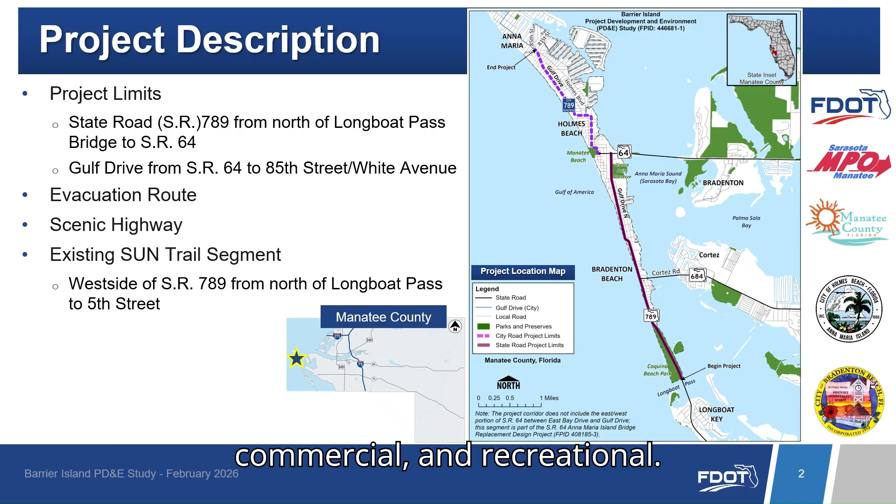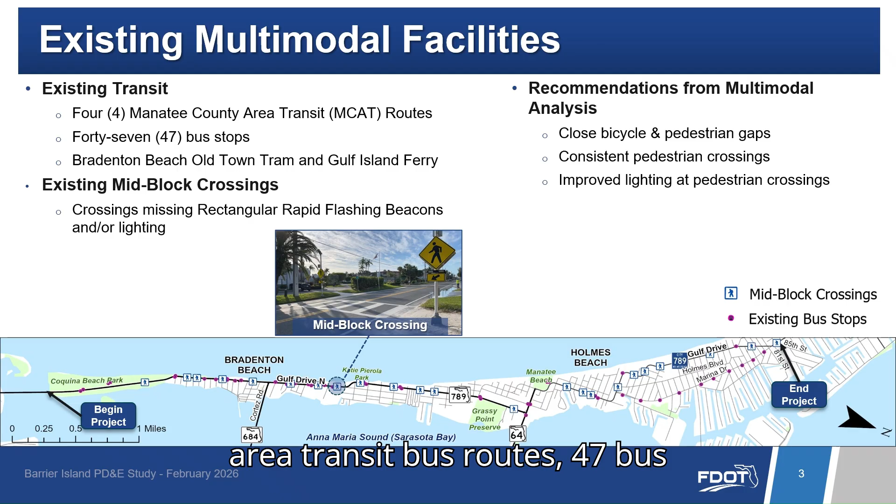The study area offers several ways to get around, including 4 Manatee County area transit bus routes, 47 bus stops, the Bradenton Beach Old Town Tram, and the Gulf Island Ferry.

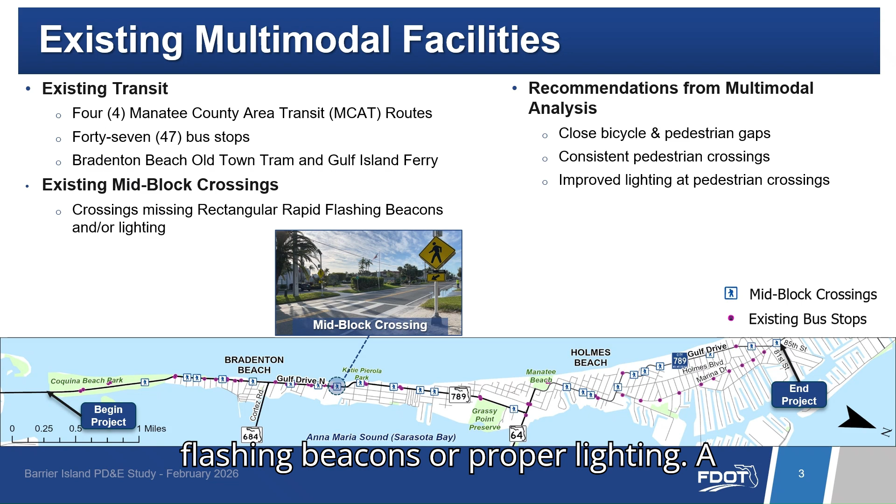Even with these options, there are still safety issues and gaps, especially at mid-block crossings, where some locations lack flashing beacons or proper lighting. A recent multimodal analysis recommends closing the bicycle and pedestrian gaps, creating more consistent crossings, and improving lighting to make travel safer and more connected for everyone.

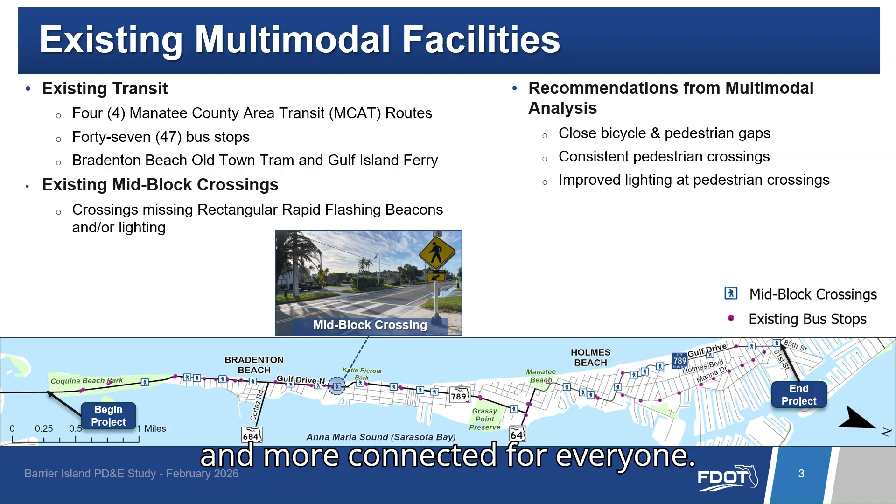This project aims to enhance safety, accommodate biking and walking, and improve connections between multimodal transportation options. The build alternatives will support connections to the SUN Trail network, enhance linkage to the multimodal improvements planned as part of the future bridge replacements to the island, and enhance connectivity and access to current and future transportation choices like the trolley service and the Gulf Island Ferry.

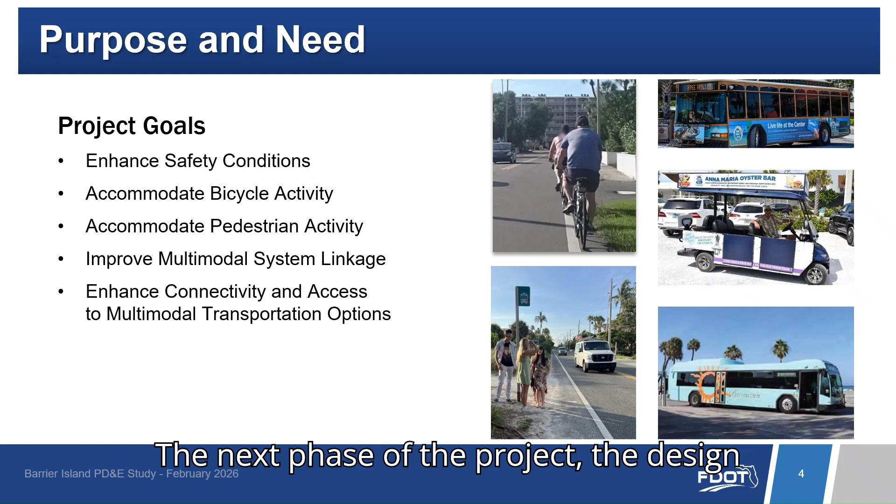The next phase of the project, the design phase, is not currently funded in FDOT's 5-year work program.

Within the project limits, State Road 789 and Gulf Drive are 2-lane undivided roadways. In many areas, shoulders, sidewalks, or bike lanes are missing, making the corridor insufficient for safely supporting people traveling by foot, bike, or other modes.

The State Road 789 segment of the project is classified as an urban major collector and extends from north of Longboat Pass Bridge to State Road 64, approximately 3.8 miles.

The Gulf Drive or City Road 789 segment of the project is within the city of Holmes Beach, from north of State Road 64 to White Avenue or 85th Street, approximately 2.2 miles. This segment of Gulf Drive is owned and maintained by the city of Holmes Beach. No bridges are being evaluated as part of this study.

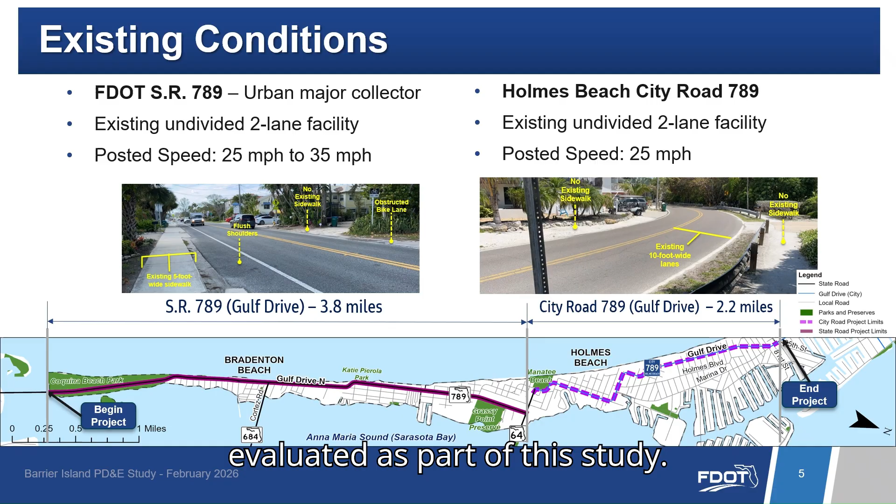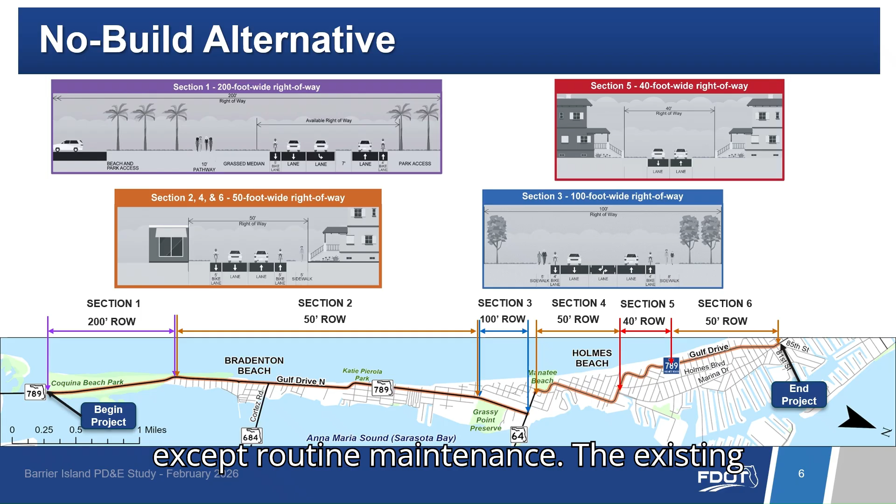Throughout this study, a no-build alternative is also considered. The no-build alternative assumes that no improvements are made to State Road 789 and Gulf Drive through the year 2046, except routine maintenance. The existing 6-mile corridor has a mix of roadway widths, walking, and biking conditions that change from one section to the next.

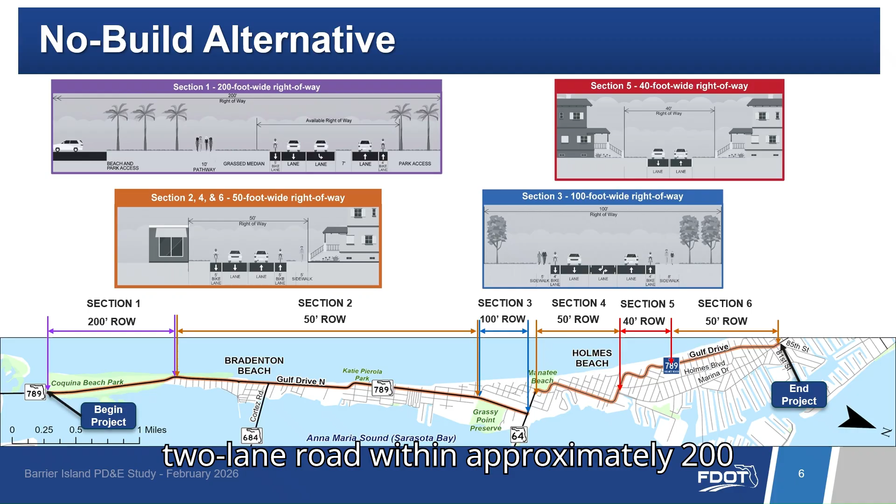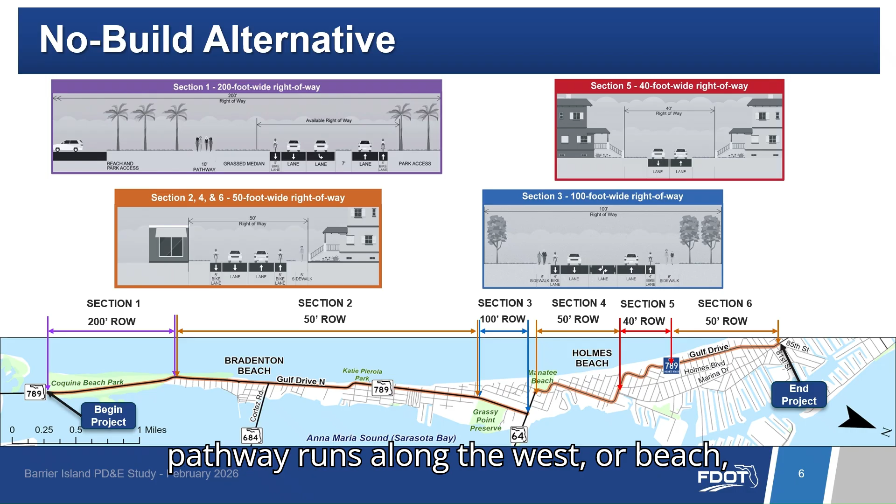In Section 1, State Road 789 is a 2-lane road within approximately 200 feet of existing right-of-way. Within the available right-of-way are 4 to 5 foot wide paved shoulders that are also used as bike lanes. A 10-foot wide pathway runs along the west or beach side.

In sections 2, 4, and 6, the sections narrow to about 50 feet of right-of-way and include a 2-lane roadway with 5-foot wide paved shoulders and a 5-foot wide sidewalk on the east side. On the west, where most of the beach access points are, sidewalks are limited or missing.

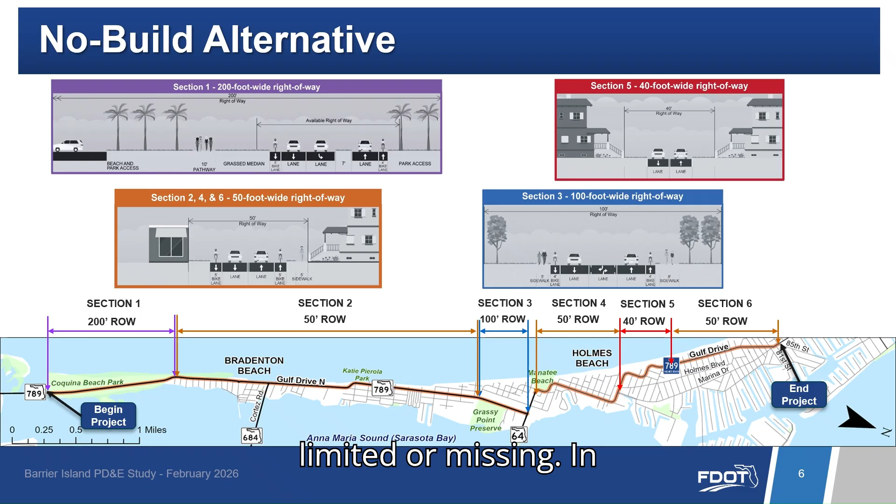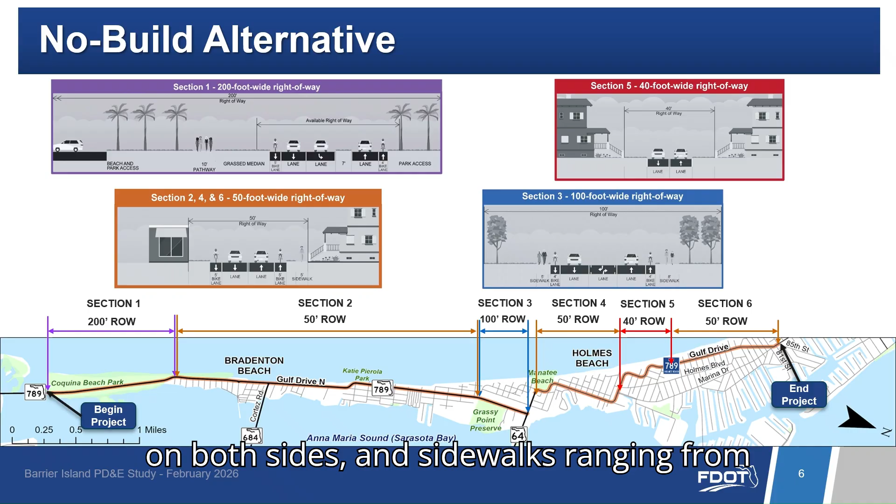In Section 3, the right-of-way widens to about 100 feet. The roadway includes 2 travel lanes with 4-foot wide bike lanes on both sides, and sidewalks ranging from 4 to 8 feet wide. In Section 5, the right-of-way narrows down to about 40 feet, with 2 travel lanes and no paved shoulders or sidewalks.

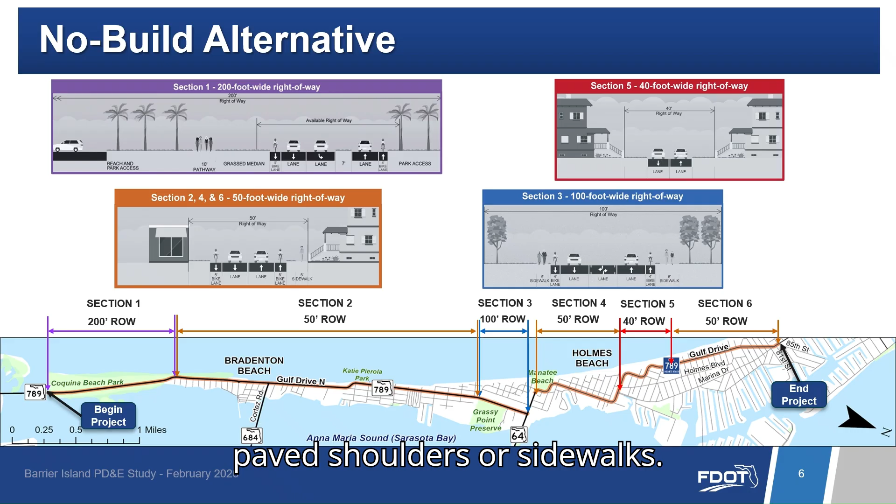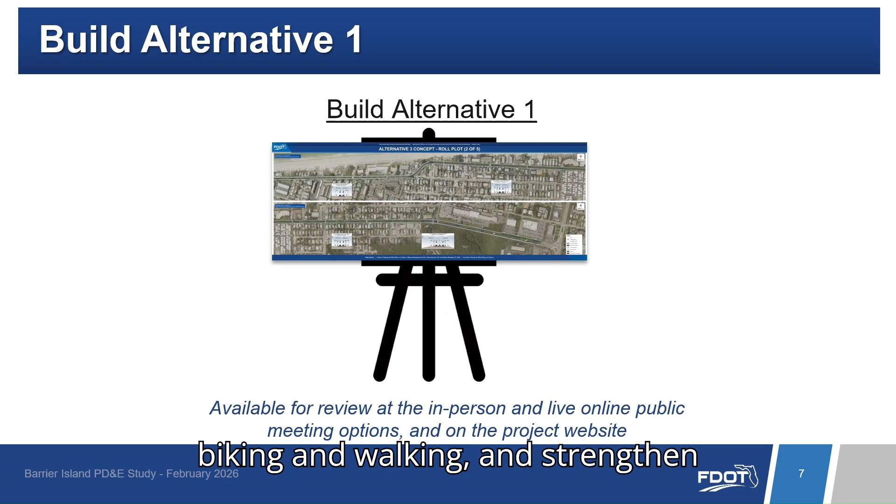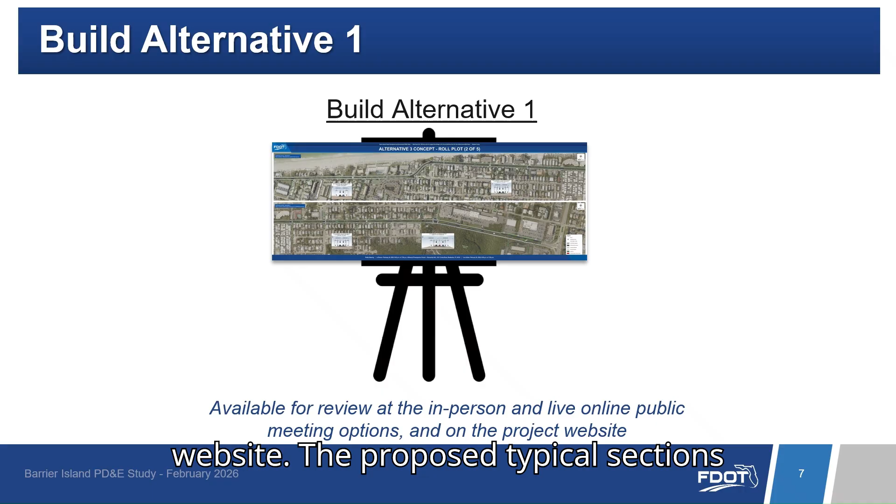Build Alternative 1 was created to enhance safety for all users, improve biking and walking, and strengthen connections to multimodal transportation options while reducing and avoiding impacts along the 6-mile corridor. Build Alternative 1 is available for you to review at the in-person and live online public meetings and on the project website. The proposed typical sections and improvements for each section of roadway is presented on the displays.

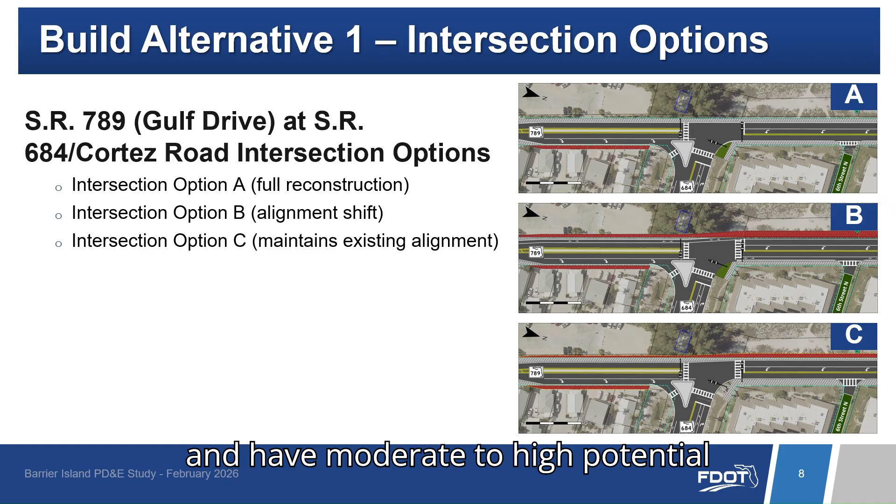FDOT is evaluating 3 options for the intersection at State Road 789, or Gulf Drive, and State Road 684, or Cortez Road. The traffic signal and operations for all options are similar. All options require additional right-of-way and have moderate to high potential utility impacts.

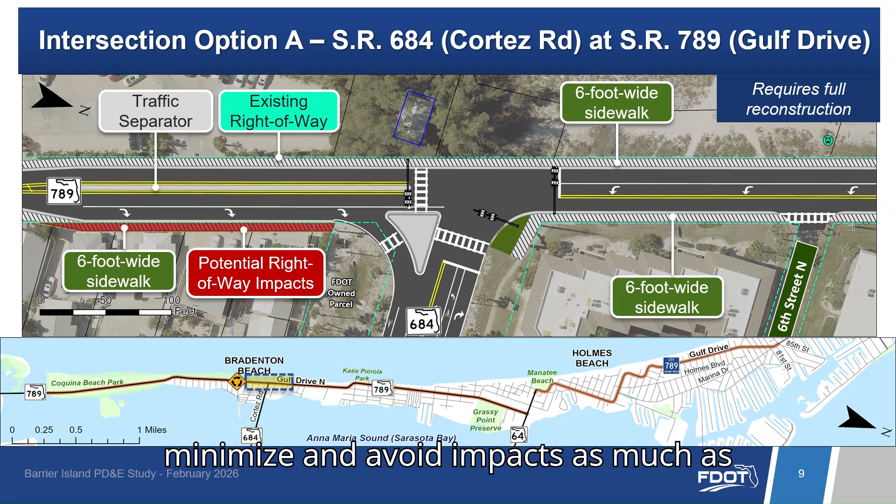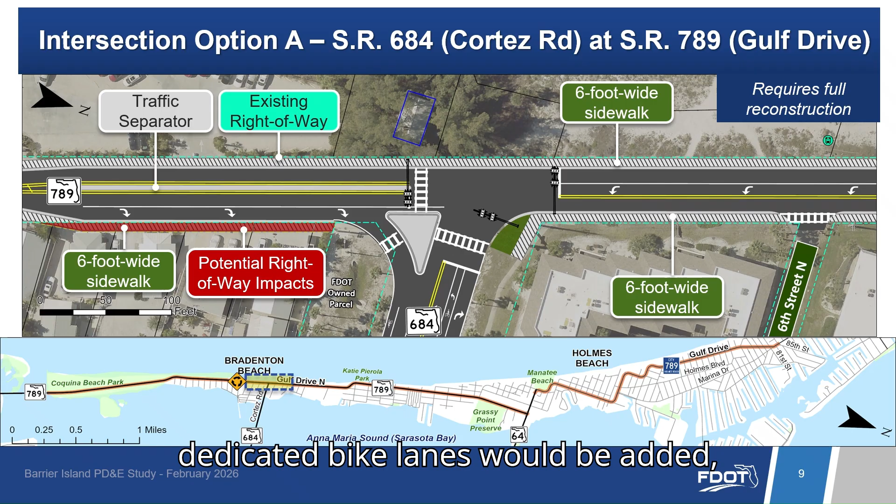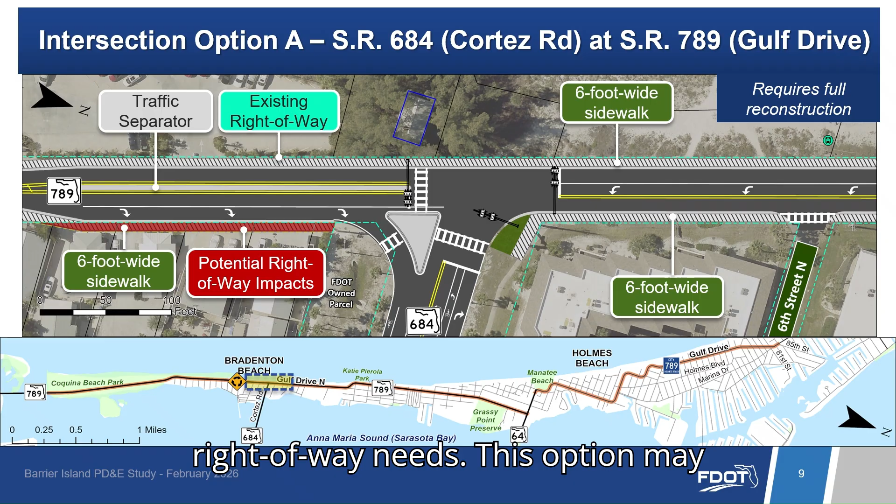Intersection Option A requires full reconstruction of the intersection to minimize and avoid impacts as much as possible. 6-foot wide sidewalks would be added to both sides of State Road 789 to improve pedestrian access, but no dedicated bike lanes would be added, leaving limited space for cyclists. While it improves safety and walkability, it also has a high potential for utility impacts because of the additional right-of-way needs. This option may result in impacts to 5 parcels.

No residential displacements are expected. Option A would be the most disruptive of all the options to travelers during construction.

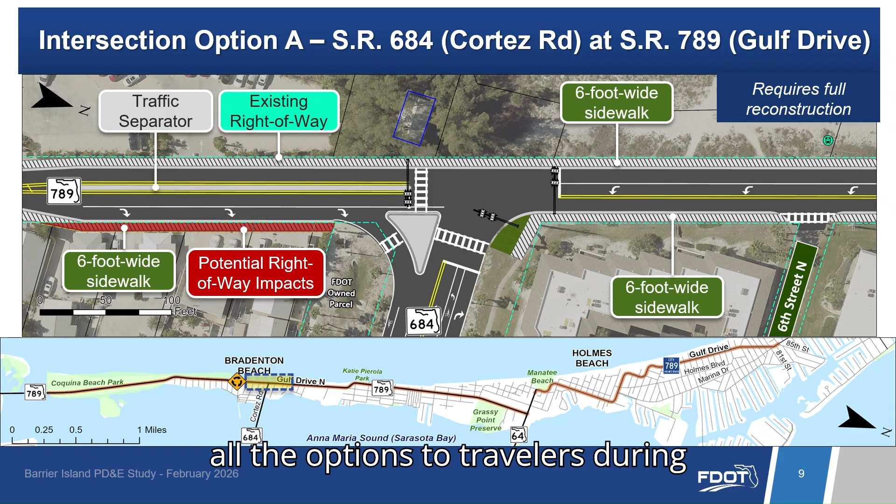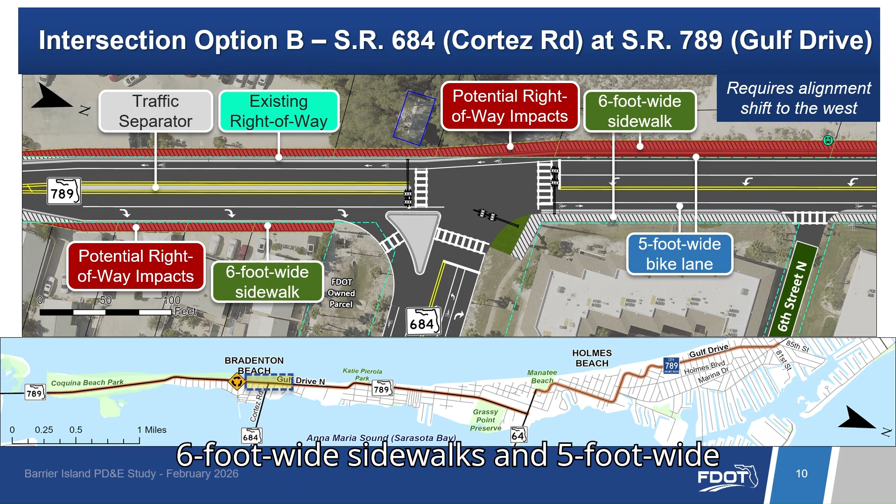Intersection Option B improves walkability and cycling by providing a 6-foot wide sidewalk along the southeast side of State Road 789, as well as 6-foot wide sidewalks and 5-foot wide dedicated bike lanes along the other sides of State Road 789. This option separates cyclists from pedestrians, but requires a shift in alignment to the west and widening on both sides of the road. This option may result in impacts to 12 parcels.

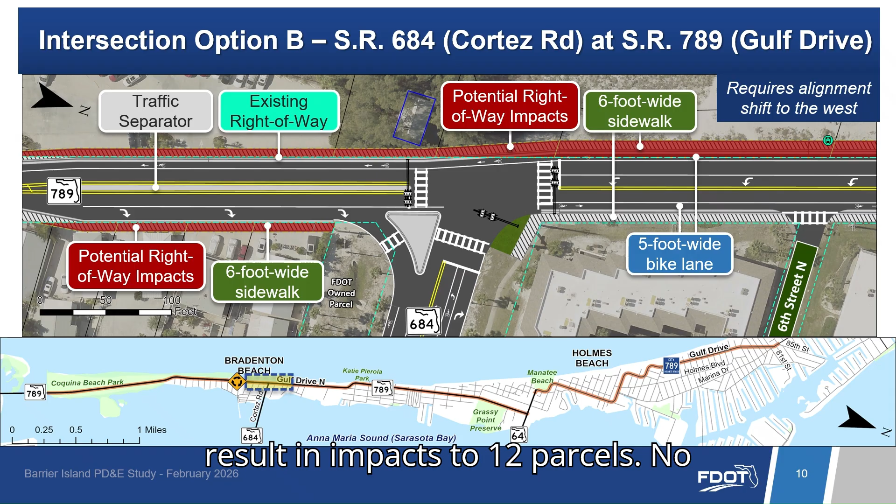No residential displacements are expected. Minor impacts to the beach or coastal scrub are anticipated with this option.

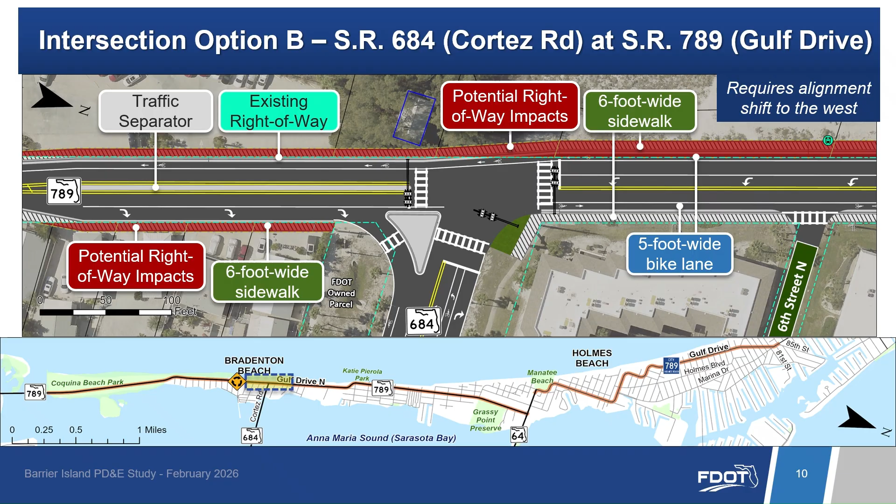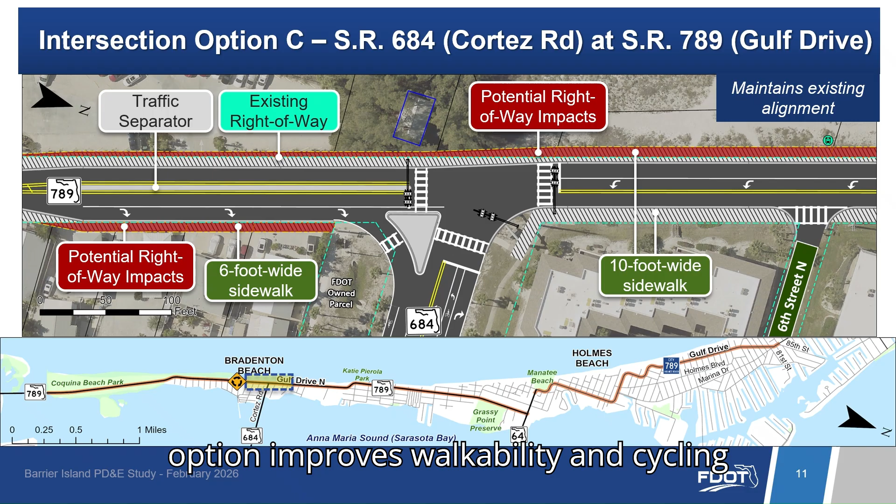Intersection Option C maintains the existing roadway alignment but requires widening on both sides of the road. This option improves walkability and cycling similar to Option B. Option C provides a 6-foot wide sidewalk along the southeast side of State Road 789 and 10-foot wide sidewalks along the other sides of State Road 789 for shared use.

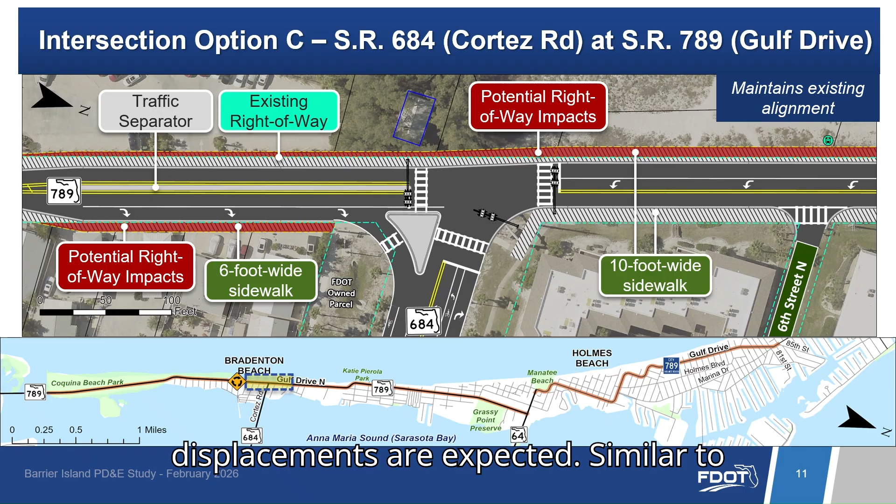This option may result in impacts to 12 parcels. No residential displacements are expected. Similar to Option B, minor impacts to the beach or coastal scrub are also anticipated with this option.

As a result of previous stakeholder input, 2 alternatives were developed for the section of Gulf Drive in Holmes Beach between 85th Street and Palm Drive. Build Alternative 1Y was developed to maximize walkability and cycling by including 8-foot wide sidewalks on each side of Gulf Drive for shared use between bicyclists and pedestrians. Alternative 1Z was developed to provide a separate space for cyclists and includes 5-foot wide sidewalks and dedicated 5-foot wide bike lanes along both sides of Gulf Drive.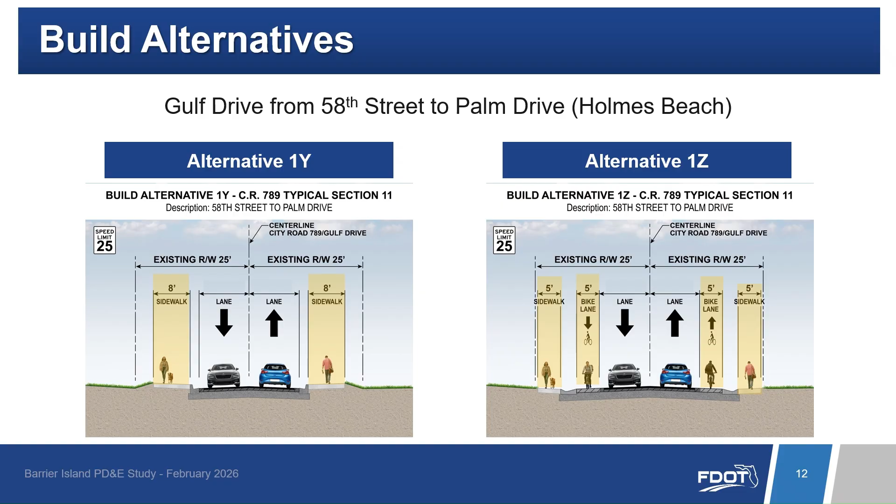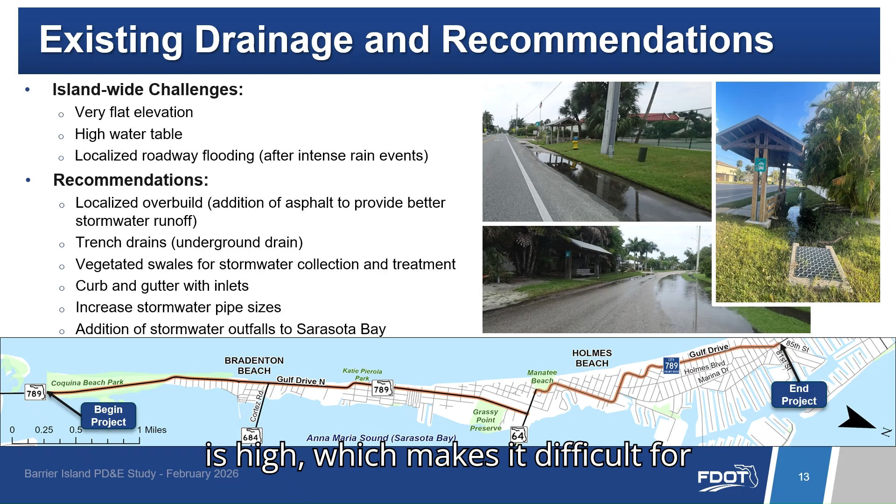The study area on the barrier island faces natural drainage challenges because the land is very flat and the water table is high, which makes it difficult for rainwater to drain after heavy storms. As a result, parts of State Road 789 and Gulf Drive experience localized flooding during intense rain events.

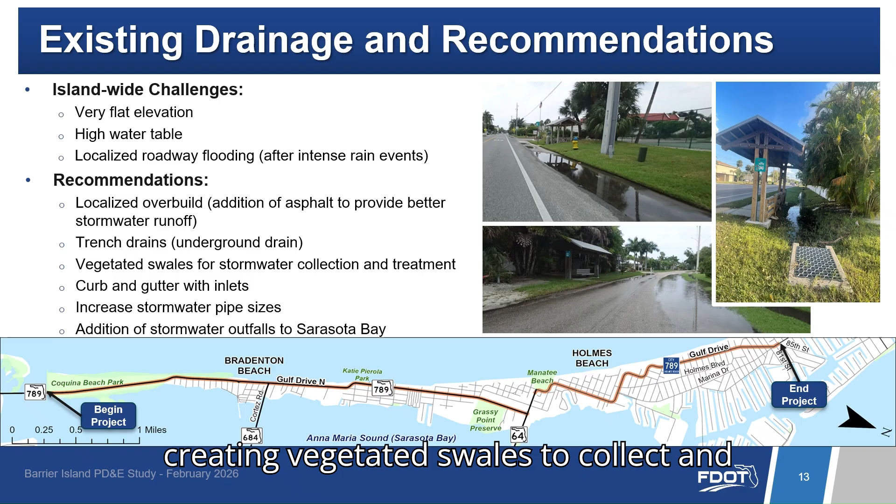To help reduce these issues, several improvements are recommended, including adding small areas of roadway overbuild for positive drainage, installing trench drains, and creating vegetated swales to collect and treat stormwater naturally. Additional upgrades include adding curb and gutter systems with inlets, increasing stormwater pipe sizes, and providing new outfalls.

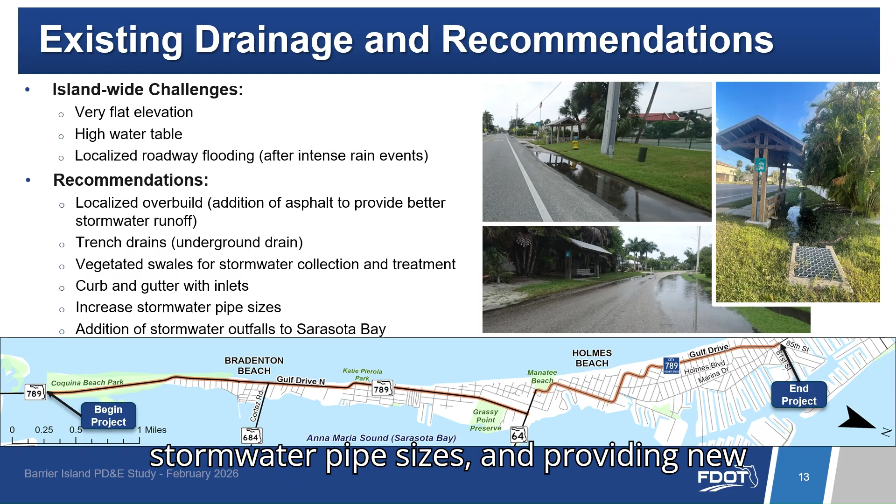Together, these improvements aim to reduce flooding and make the corridor more resilient during major rain events. The study area on the barrier island is home to important natural resources, including high-quality coastal scrub habitat located adjacent to State Road 789. This type of habitat supports a variety of native plants and wildlife and is considered one of Florida's valuable coastal ecosystems.

The corridor also borders Sarasota Bay, which is a designated outstanding Florida water, meaning it has exceptional environmental value and receives the highest level of protection in the state. Based on current environmental reviews and impact assessments, no significant impacts to protected species are anticipated as part of this project.

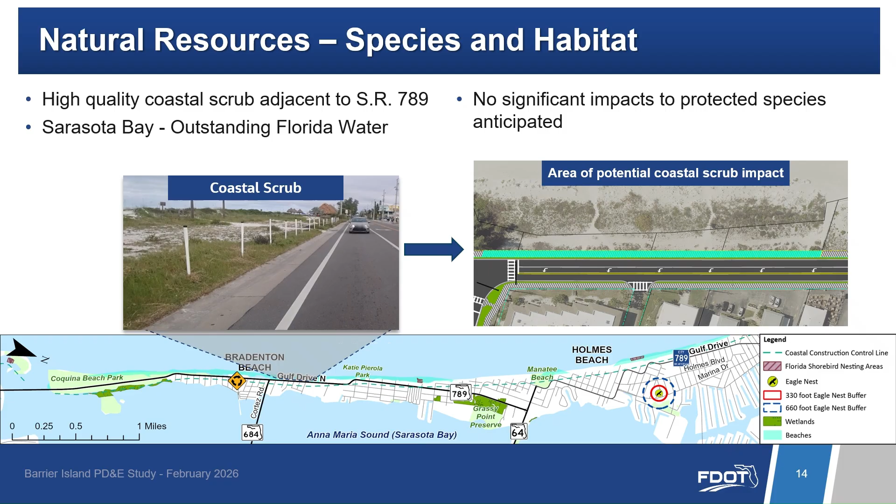This PD&E study is ongoing. Project team members will continue to develop, refine, and evaluate alignment alternatives for State Road 789 and Gulf Drive throughout the remainder of the study.

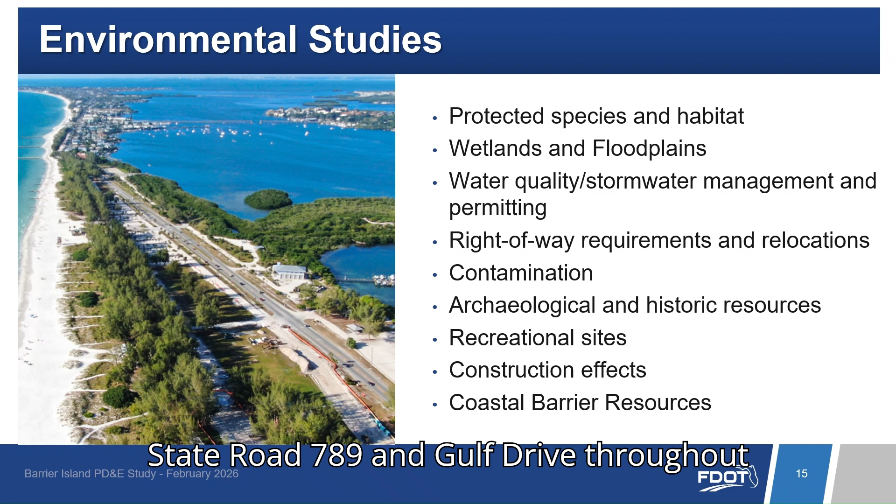Potential environmental effects associated with the proposed build alternatives are under careful evaluation and include detailed studies of protected species and habitat, wetlands and floodplains, water quality and stormwater management and permitting, right-of-way requirements and relocations, contamination, archaeological and historical resources, recreational sites, construction effects, and coastal barrier resources.

Based on data already collected, we do not anticipate significant effects associated with the build alternative.

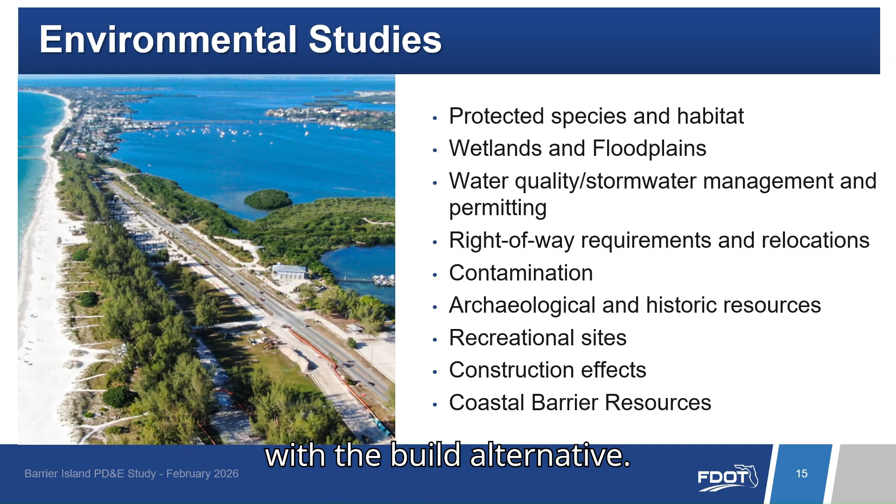The evaluation matrix included in your handout and on display shows a summary of results of preliminary analysis for the build and no-build alternatives. This matrix is also on display this evening.

Your comments will help the department make its selection of the preferred alternative. We encourage you to submit your comments at the in-person meeting, through the project webpage, or by email or mail to the project team. Though comments are accepted at any time, they must be received or postmarked by March 9, 2026, to be included in the formal public meeting record.

The project team will consider all comments and, where feasible, will incorporate them into the development of the preferred alternative.

FDOT will present the preferred alternative at an upcoming formal public hearing for this project, which is tentatively scheduled for late 2026. At the end of this study, FDOT will finalize the preferred alternative for State Road 789 and Gulf Drive. We will mail project newsletters to keep you informed about the study's progress.

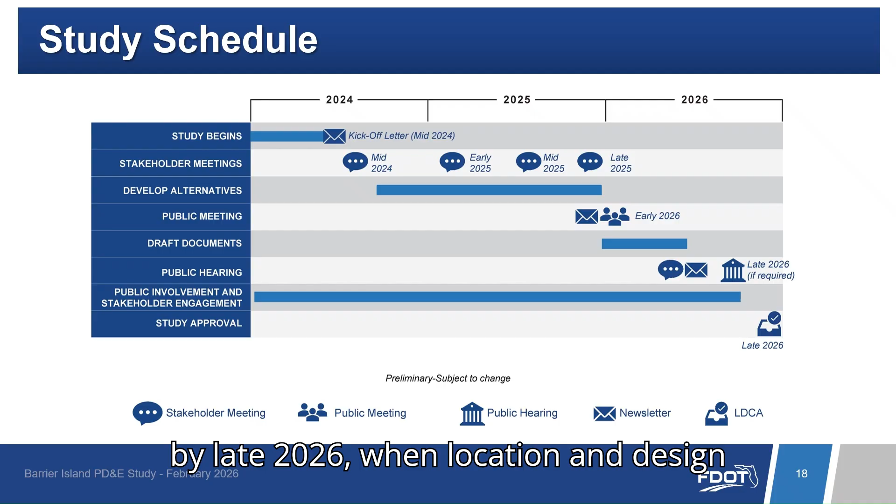The department anticipates completion of this PD&E study by late 2026, when location and design concept of the preferred alternative will be submitted to the FDOT Office of Environmental Management for approval.

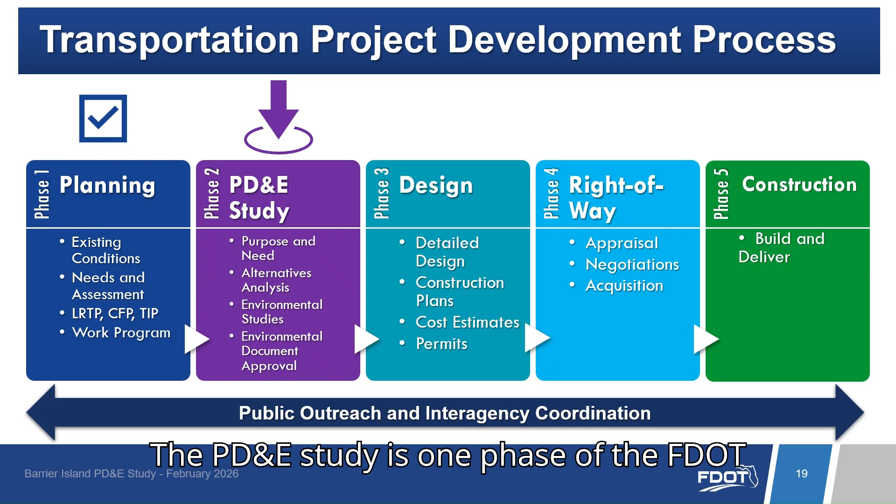The PD&E study is one phase of the FDOT transportation project development process. At this time, design, right-of-way, and construction phases are not funded in the FDOT's adopted 5-year work program.

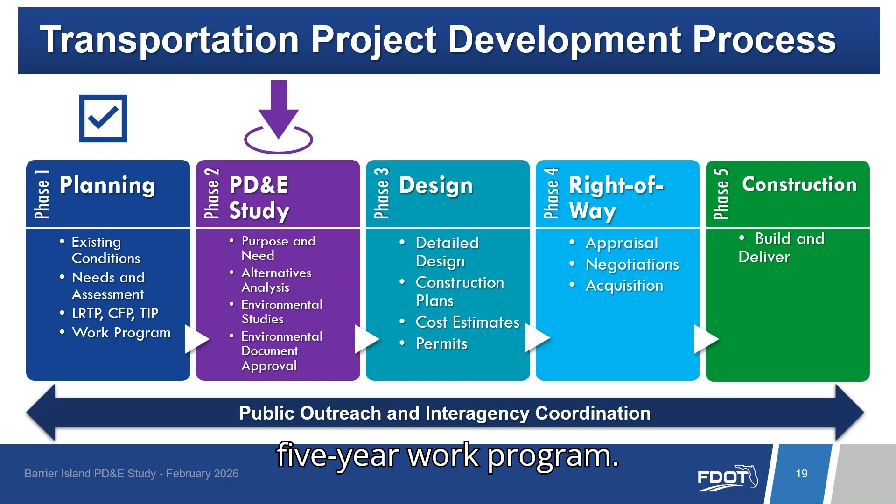The Barrier Island PD&E study team is here tonight to answer your questions and discuss the project. We invite you to ask them your questions and to review all the aerial maps, plans, and illustrations.

This PD&E study is being conducted and completed according to the requirements of the National Environmental Policy Act and other related federal and state laws, rules, and regulations, which will qualify future phases of this project for federal funding. For additional information on all rules and regulations this meeting follows, please see the Federal and State Requirements Board.